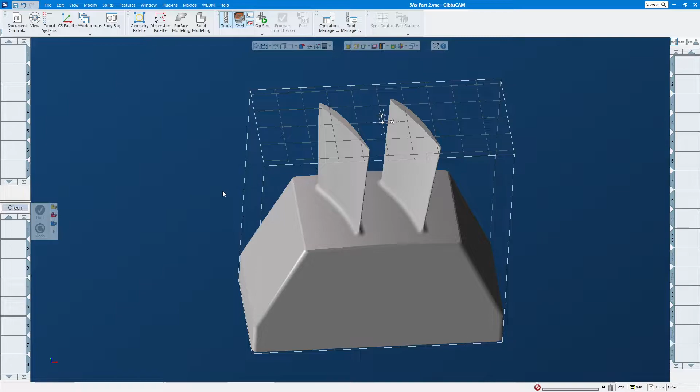Rough material out. As you can see here, I have an impeller plate here, only two, but it had this, and it's not a flat wall bottom here.

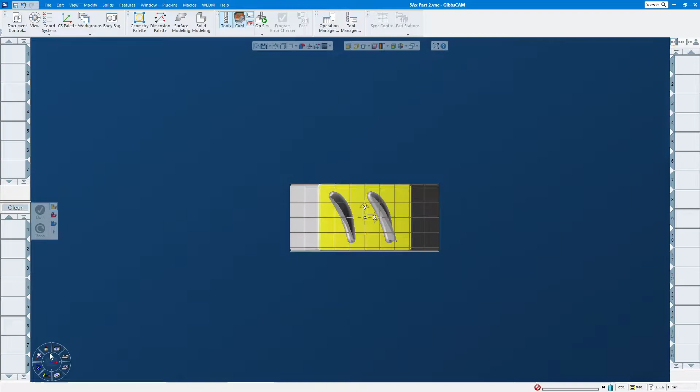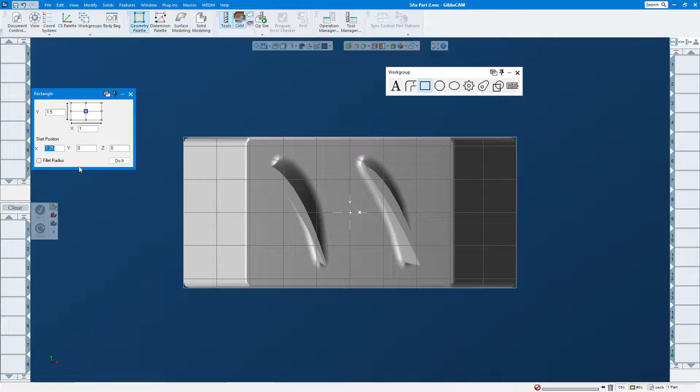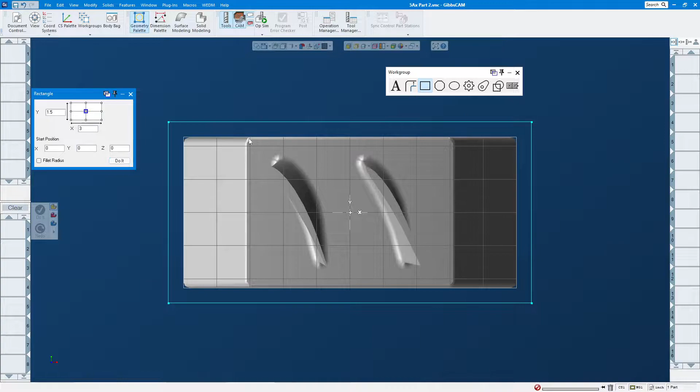But let's just do this. Let's draw some stock. Okay, so let's say some stock. Too small, let's do 1.5 by 3. All right.

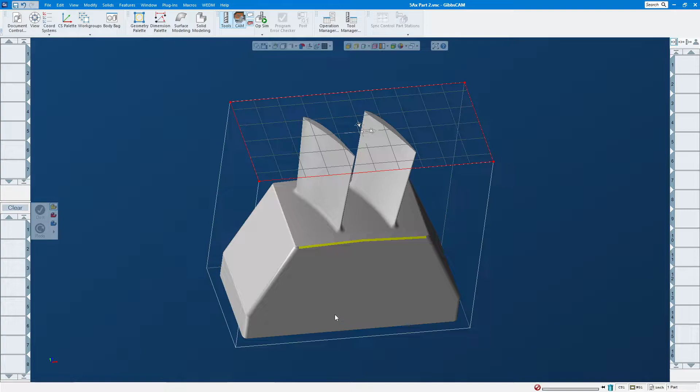All right, turn that geometry into a stock, right? And then here is the model. Let's say if we want to rough, let's do rough all the way down. All right, so let's create a tool.

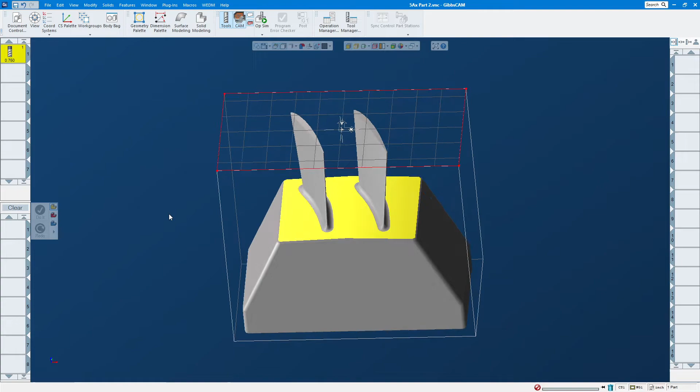Probably we have to create two tools. So the smaller tool can go through here. I don't know what way, from here to here, probably. We can change it later if it doesn't work out.

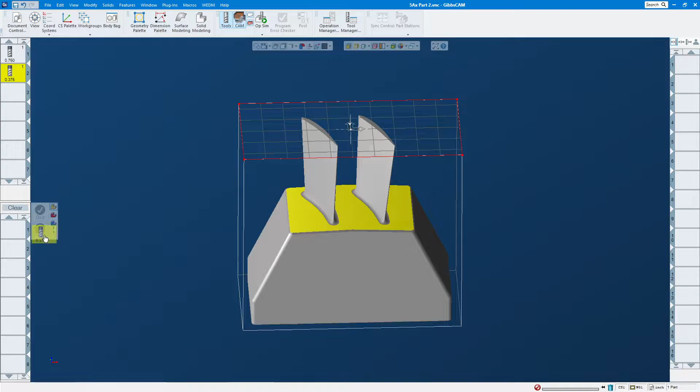Alright, so create two end mills. First one, I want to rough this first with a smaller tool. Move to Dome, volume mill. Feed and speed, whatever you want. Let's do that.

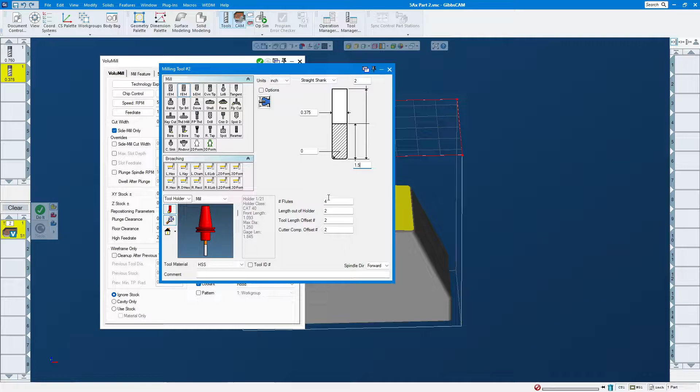Alright, so that's okay. I mean, you can do in one depth, but let's do half. So about 0.637 for each pass. It's step down.

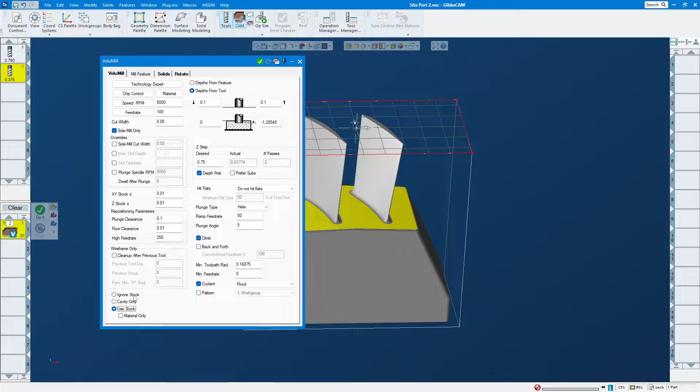Okay, so let's see side mill, leave material for finish. Okay. So since we're gonna use 3D VoluMill, so we're gonna use this instead of this one. So you have to check this, right? Check material turns. Okay.

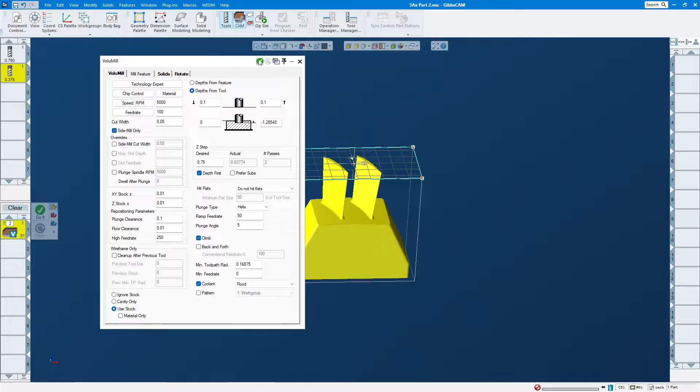Turn this one on and select this. Do it. Let's see what it look like. Okay, so it doesn't go in there. And it is probably too long—I mean too big, sorry.

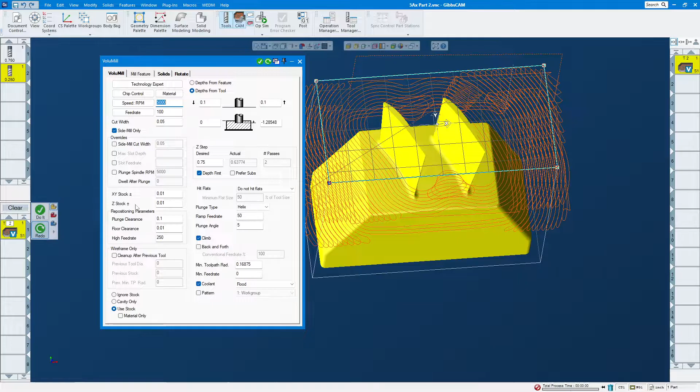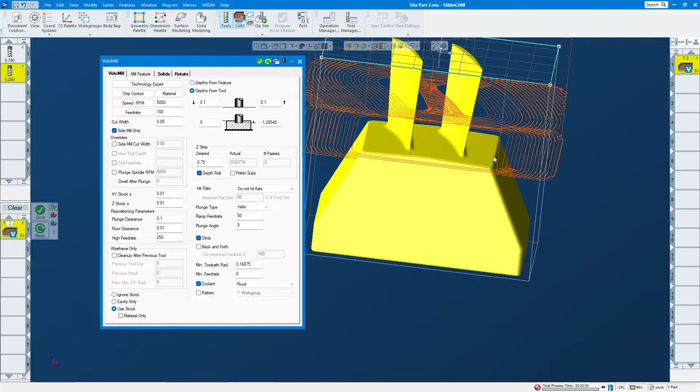Right. There you go. Okay, so this bottom here doesn't go here, but then because of the depth here, we can do one clean up to 250. Let's see.

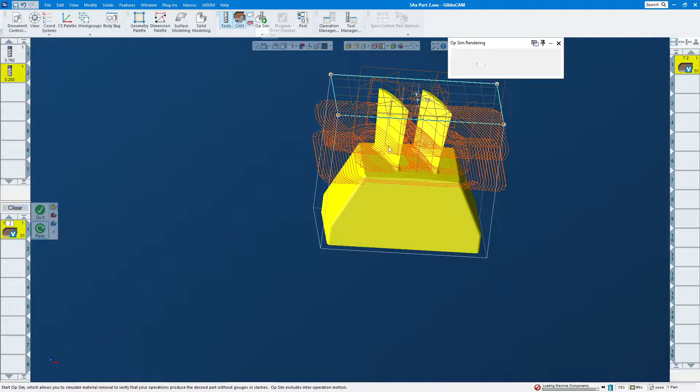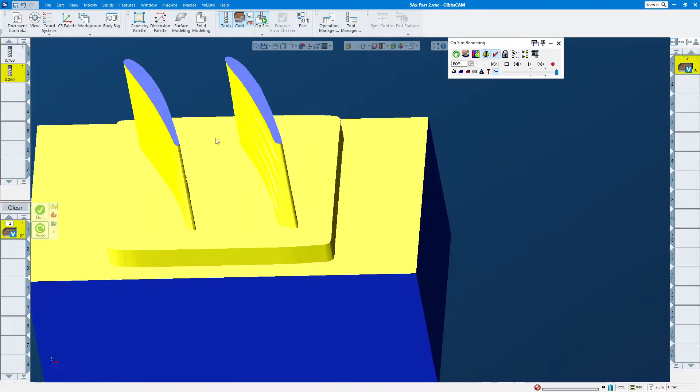Alright, there you go. So let's render it. Okay, just like that. So rough all the material out, and it's fairly easy to do, but it's a really good toolpath.

Alright, let's rough all the way to bottom with the bigger. So we don't have to start at 0, but we start from there.

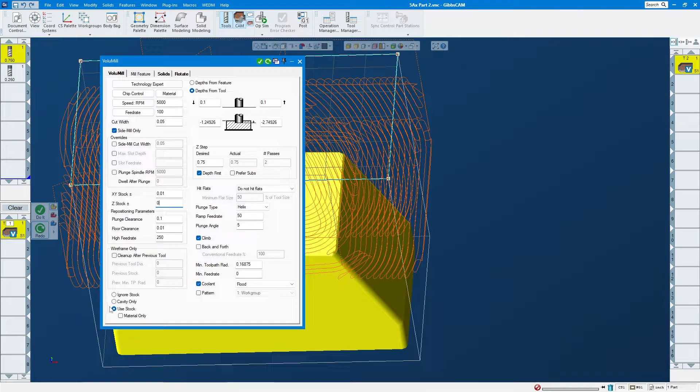Same thing. This one we don't need to. We just need that one too. Oops. Here you go.

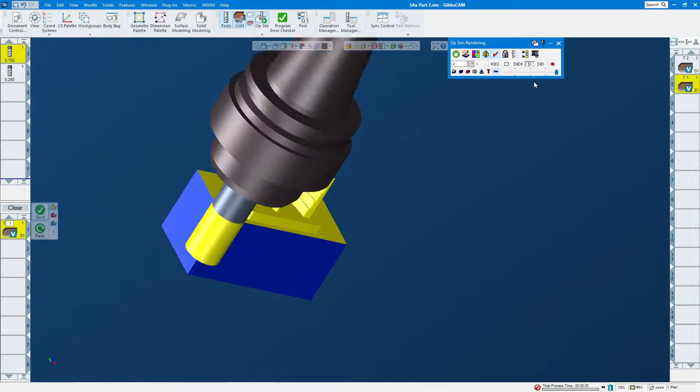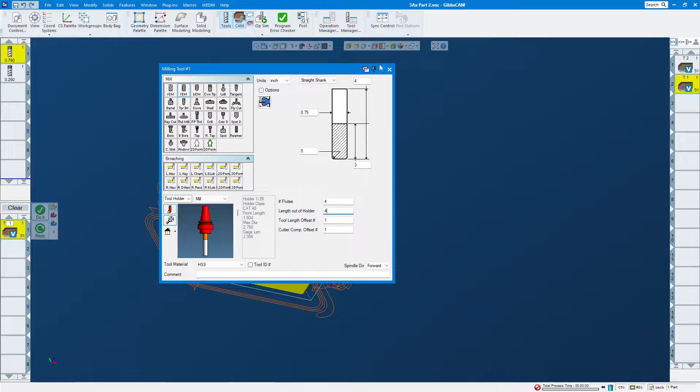Yep, it is because of the tool that I don't leave it long enough. So let's do 3, 4, 4. Well, this number is something you have to figure out yourself based on your tool, and then you put it in. This one I just put a random number, so when I render, it doesn't alarm out.

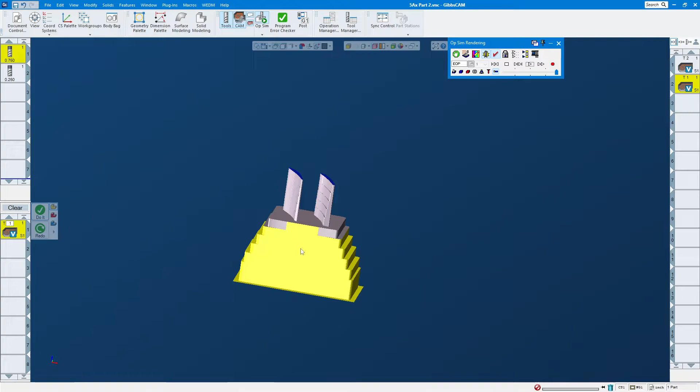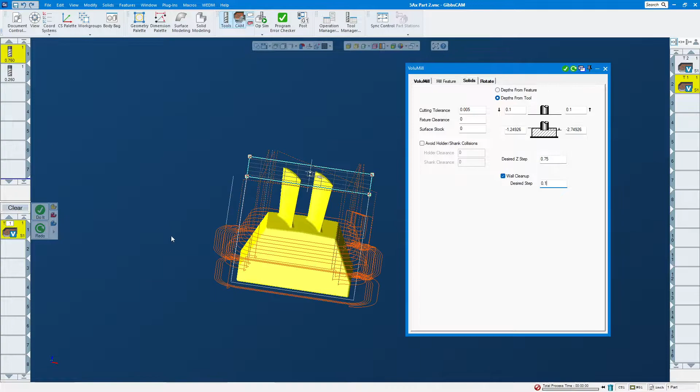First tool rough out, second tool. As you can see, there's a big chunk of material left here. We can clean it a little bit more, or better, when you adjust this one to a lower setting, and then it steps down after the main rough, and then it will step up that much, so it will remove most of the material out, as you can see here.

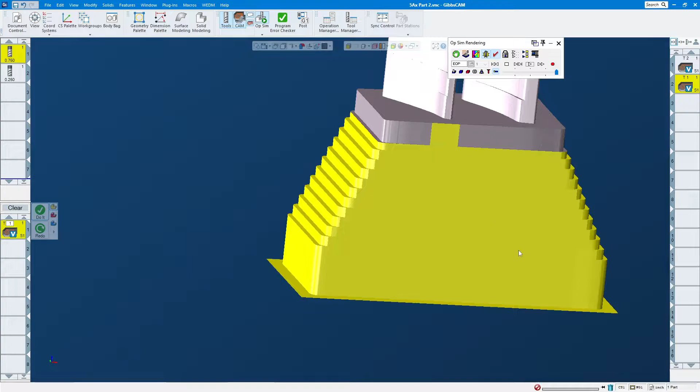See, now it looks better, and then you can thin the side with whatever tool you want to rough. So alright, that basically is a 3D volume mill. As you can see, it's fairly easy, fast, and very effective to rough material.

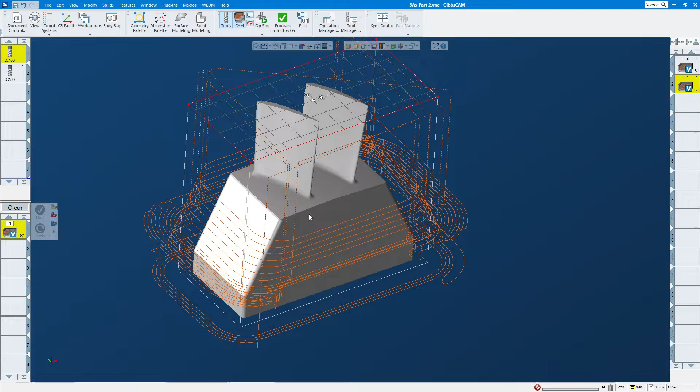Alright, let's compare it to a 2D volume mill. As I showed you in the previous video, you can use just a regular geometry to rough stuff out, but let's say this one is a bit more difficult than the other one.

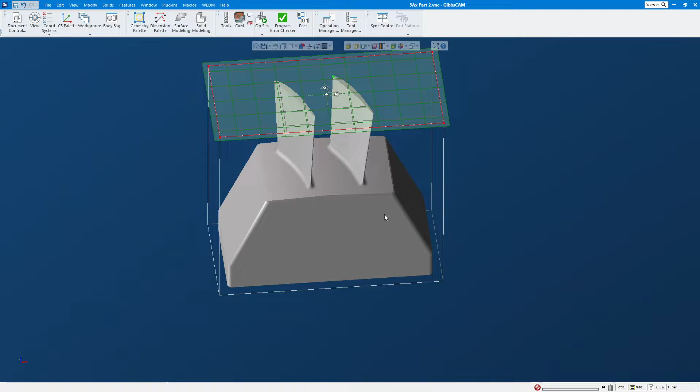So let's get some geometry out, and if you don't have a 3D volume mill, you can do 2D volume mill too.

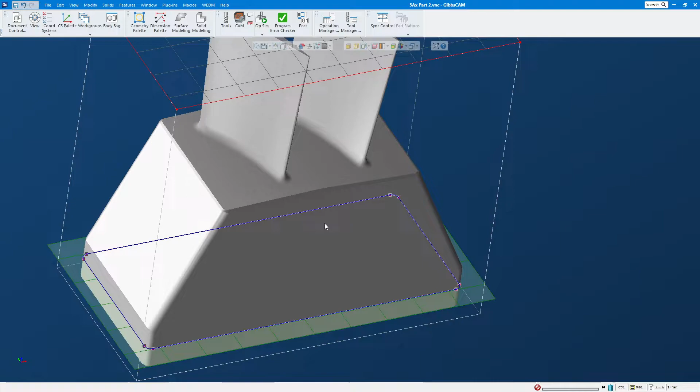Sorry, I feel a little bit tired today. The weather here is crazy—it was hot, like 75 the last few days, and then I think Wednesday or Tuesday last week was like 72, 75, and then Monday it was snowy.

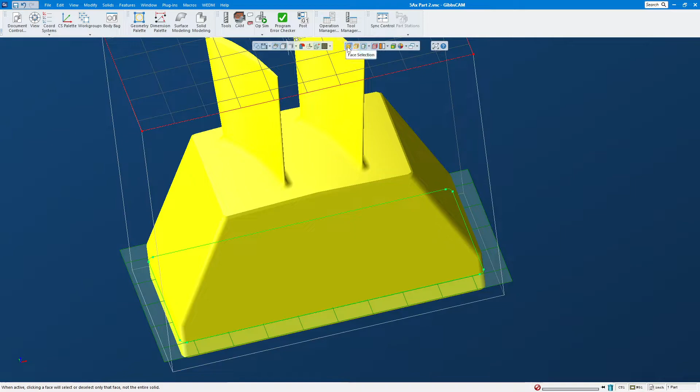Alright, let's see here.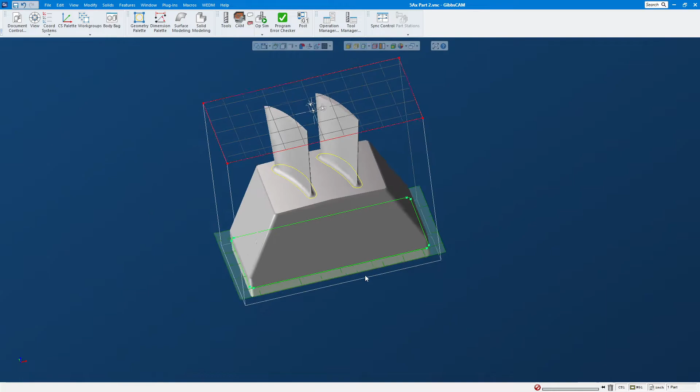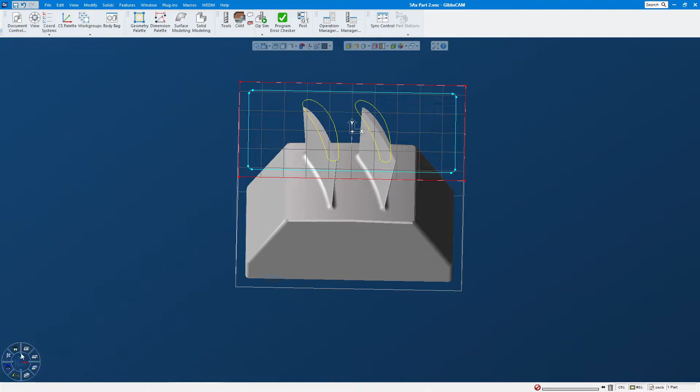Full step. Alright, just so you understand, whatever geometry you pick, you have to make sure all the depths are the same. Ooh, this one is...

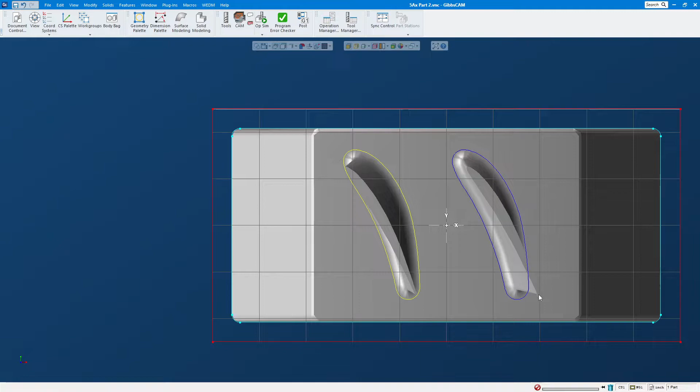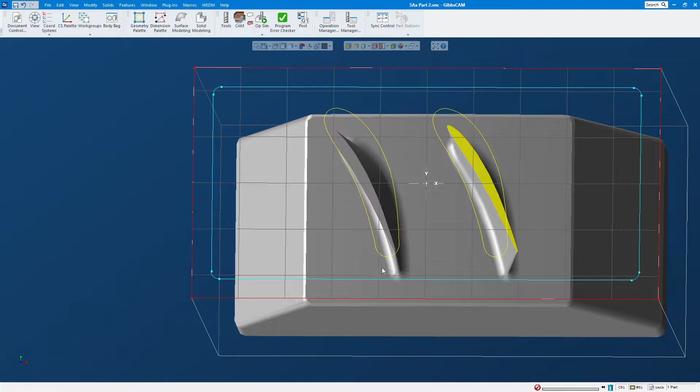So the geometry, it may not work, same as you can see here. So we have to make sure that the geometry we take out covers the model. That's why this kind of model, or this kind of stuff, it's much better to use 3D Volume Mill. But yeah, we can figure it out.

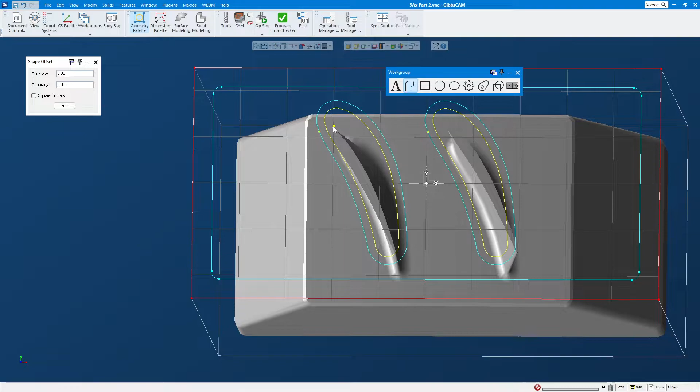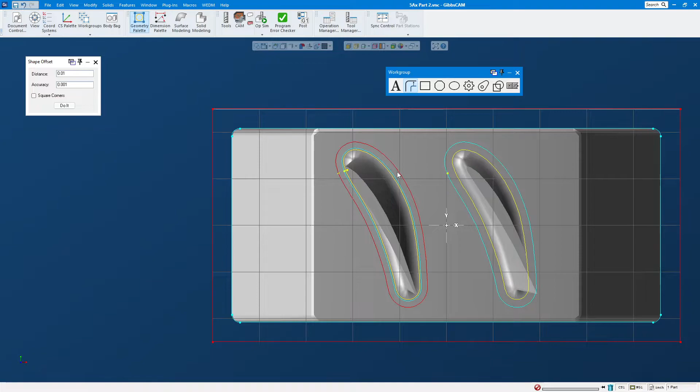Alright, let's see, that a little bit too big. I think that should be good. Of course, when you rough stuff out, you want to rough as much as you can. Okay, and that's good enough. Ooh, this one it's gonna be tough.

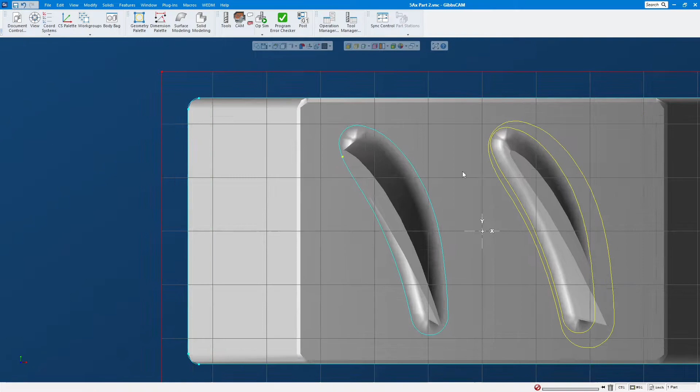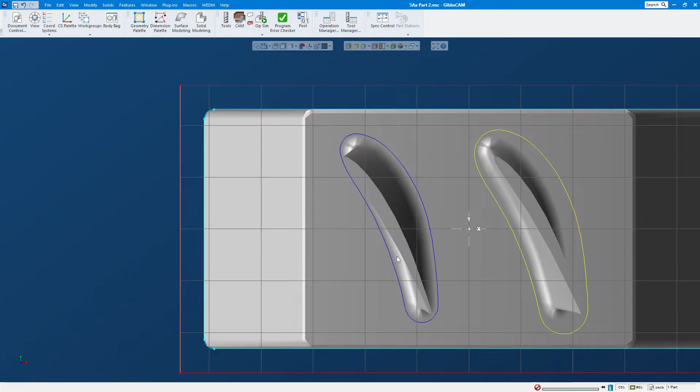Alright, why do I move geometry like that? As you can see here, this radius, so I want to make sure my geometry is clear with the model, right? And you can see here, it's not a good way to do it, but let's see. Okay, still okay. Yeah, this is not a good way to do it.

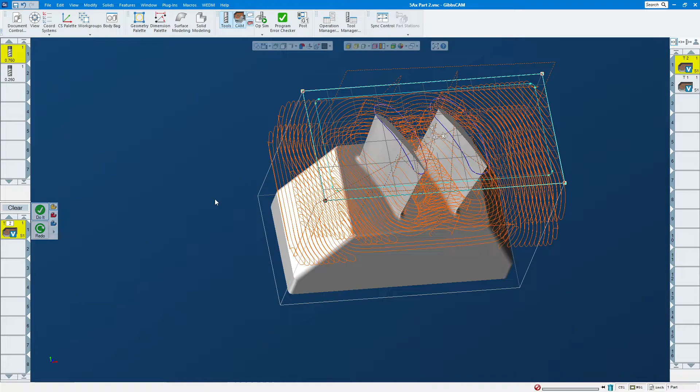But just in case you don't have a license for 3D VoluMill, this is another way you can draw it out. Let's try the same tool, rub this one out with this. So you select the three geometries, right? And then back to here, you have to select this - ignore stocks. Let's see what it does.

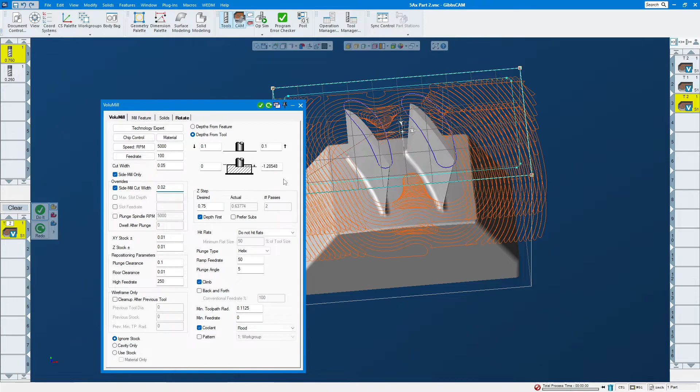Okay, it doesn't go in again because of this. Here, floor clearance. Yeah, the tool's not gonna go in there because the space between here isn't big enough.

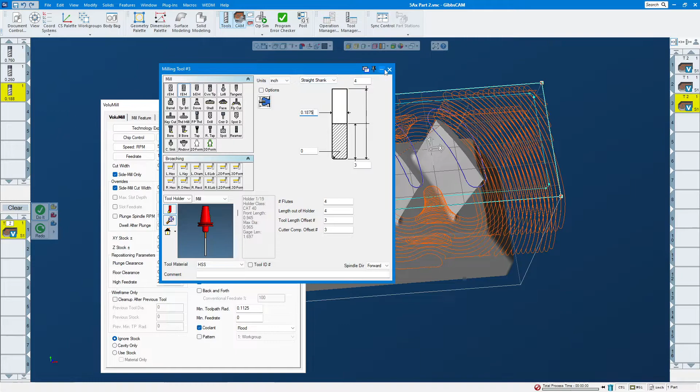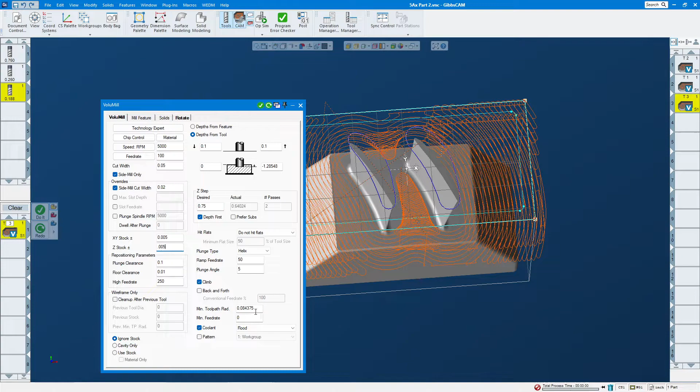Let's try to use a different tool and see. It's not ideal, but let's try it and see what it does. Still... let's see here. Right. Oh, okay, I know why. Let's try this.

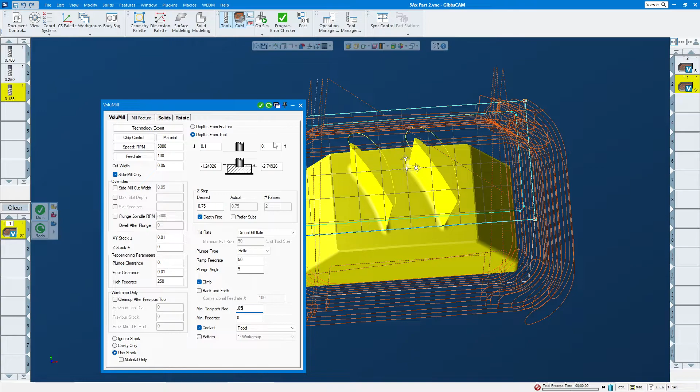Everything the same, but I will adjust this one to a smaller radius, to 0.05. What did I do? What did I do? Oops, Control Z. Okay, well, here it is. Sorry, let's delete this one so you don't see it.

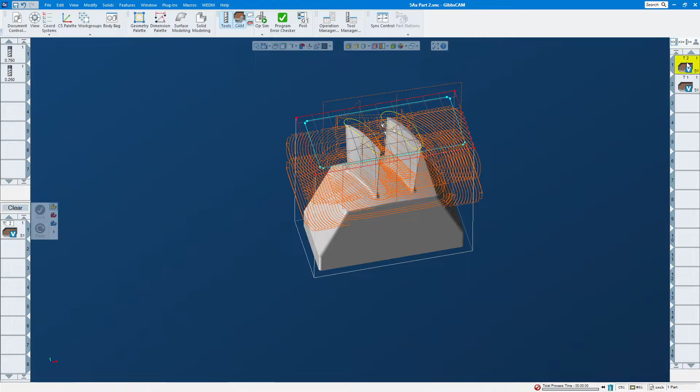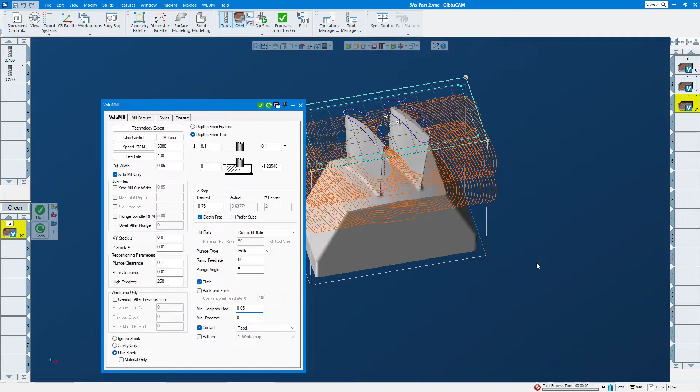So that's there, right? So now we do 2D VoluMill. Let's see if this works. 0.05, you select this geometry, and the boundary there, do it. Okay. Should go in. Okay, there you go. The same thing, maybe we leave...

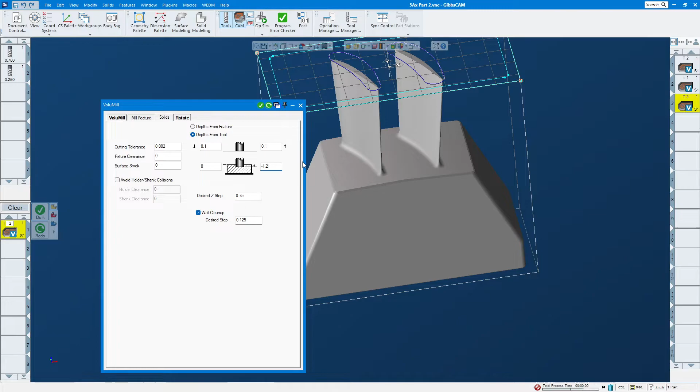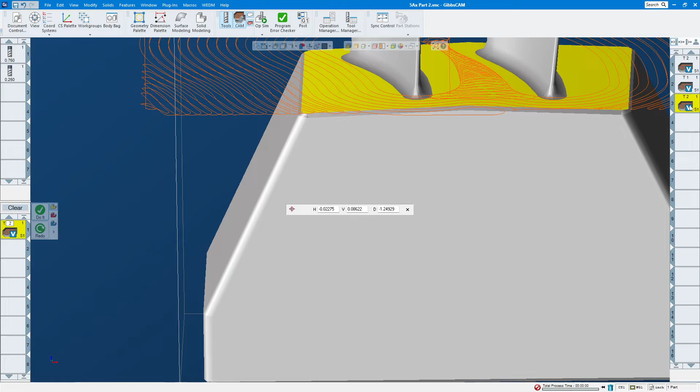Since this surface here is not a flat surface, if you put the depth too much, you can just try to pick it somewhere over here to see what the depth is, and then you can put it in. Maybe -1.24, I mean 29... 24. There you go.

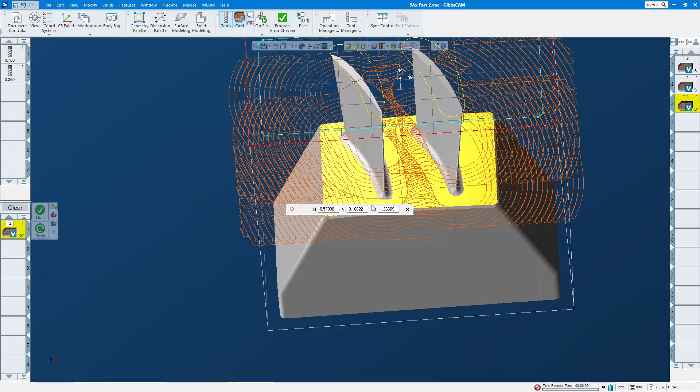Alright, and you can see it's doable, but it's not good because this is not a flat surface, plus this one here you can see. With this model, the best way is to use 3D Volume Mill, but just in case you don't have a 3D Volume Mill license, you can use 2D.

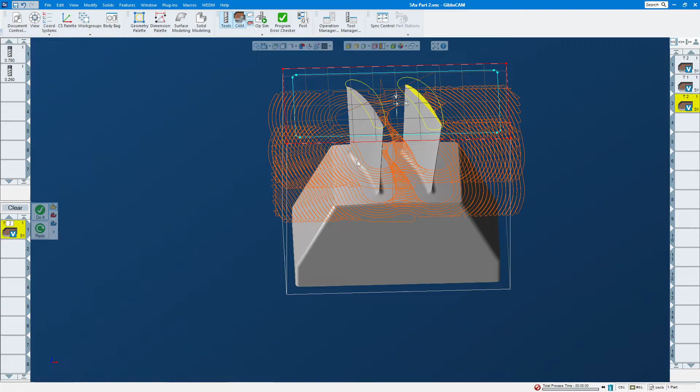The same thing down here - we can just select this, and this, the outside here should be fairly easy, so it will be the same. Just make sure you select the geometry and you click ignore stock, and there you have it.

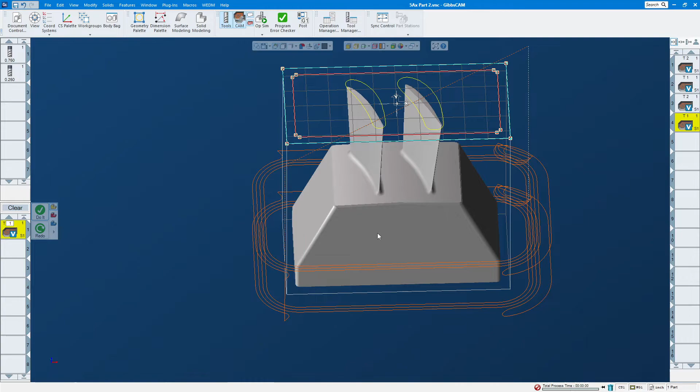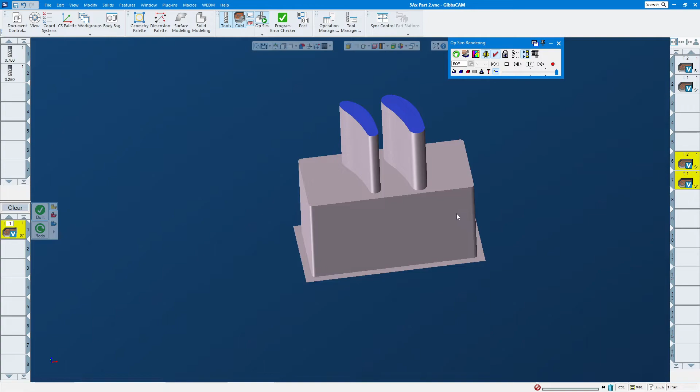Let's render this and see what it does. Okay, this one's just straight, right? It's not that good like this because this one had a taper here too.

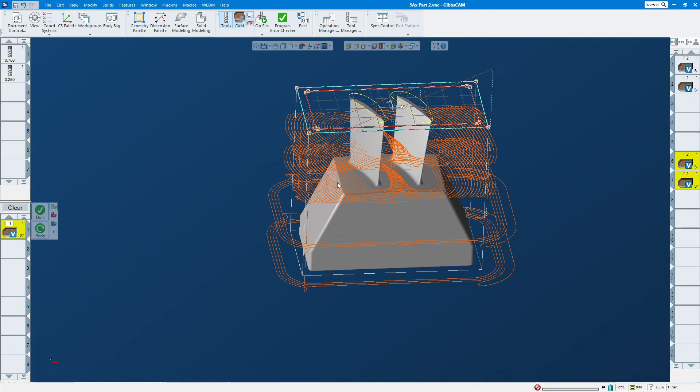So with this particular part, the best way is to use 3D Volume Mill. 3D Volume Mill is very useful when you have surfaces that aren't the same, taper surfaces, molds especially, some weird geometry or weird surfaces. 3D Volume Mill is still the best, but with 2D Volume Mill you can still rough. But for this part, I think it's better to use 3D Volume Mill.

Alright, so that covers the basics of GibbsCAM 3D Volume Mill and 2D Volume Mill.